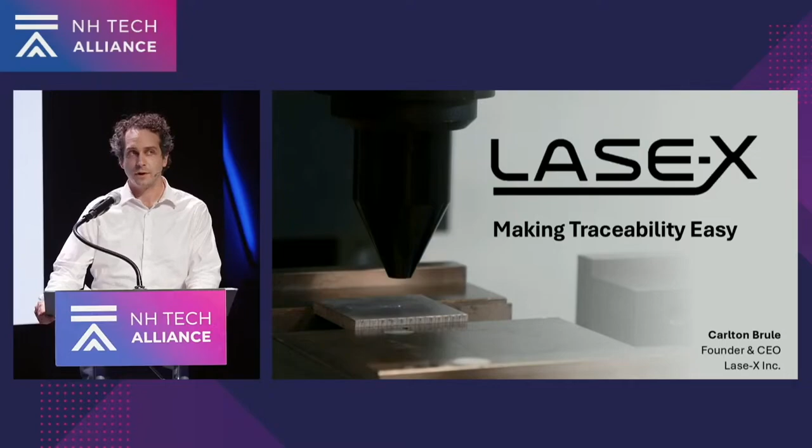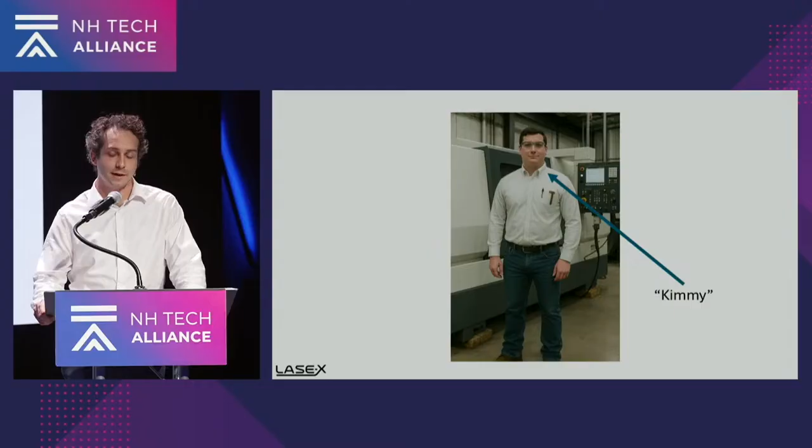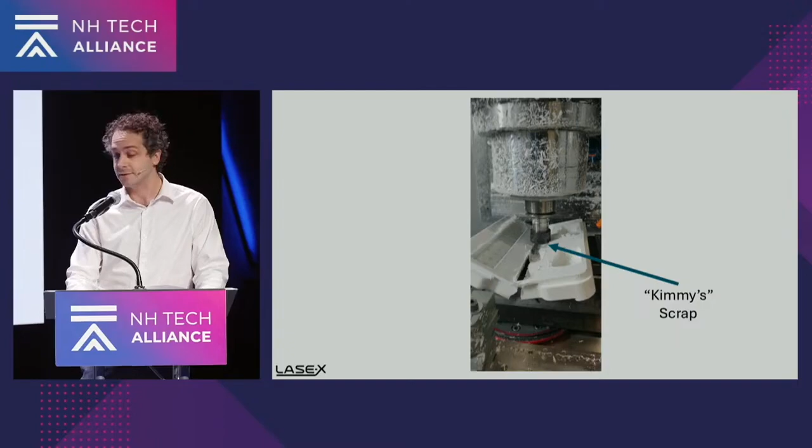It was there that a colleague and friend came to me with a problem. His name was Kimmy, an aerospace quality engineer, and he complained endlessly about the traceability requirements of the turbine blades his company was manufacturing. The problem he brought to me was twofold. First, the tool he was using to serialize parts was unreliable, often breaking or imprinting bad serial numbers on his expensive parts, causing them to be scrapped. Second, the paperwork on the shop floor was the bane of his existence. If his serializing tool was working, his parts were missing their associated paperwork, breaking the chain of custody, and again, forcing him to scrap his expensive jet turbine blades.

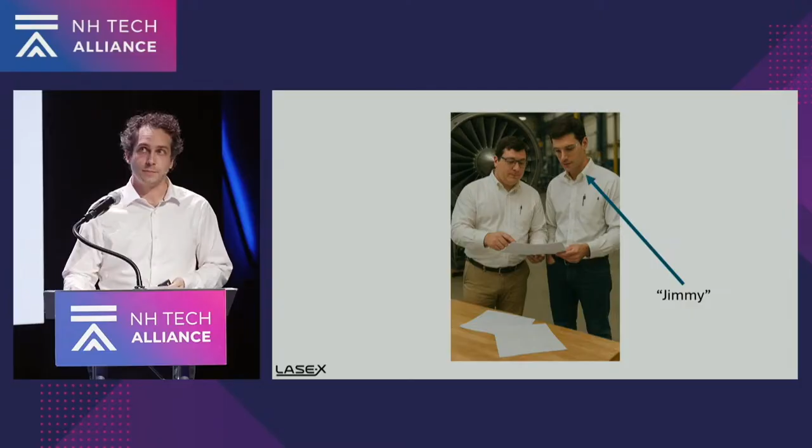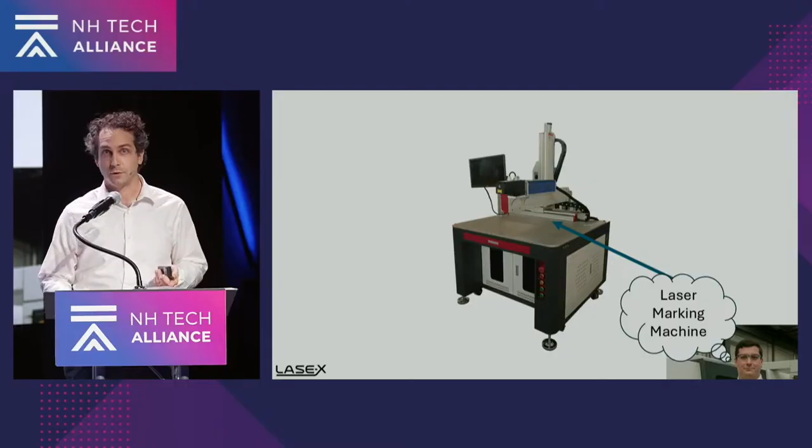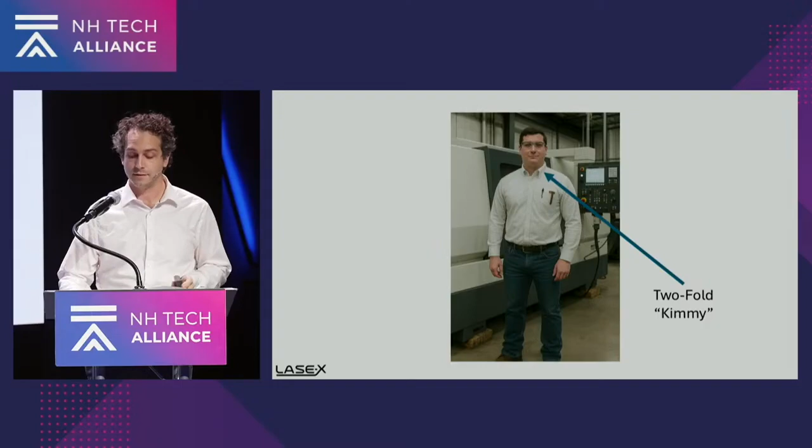Kimmy was interested in laser marking because it was a non-contacting process, meaning no more broken tools, solving at least one of his problems. However, again, his problem was twofold. First, the laser machine he wanted would add an additional step in his part production process, and second, convincing his boss that he needed a new expensive piece of capital equipment on the shop floor.

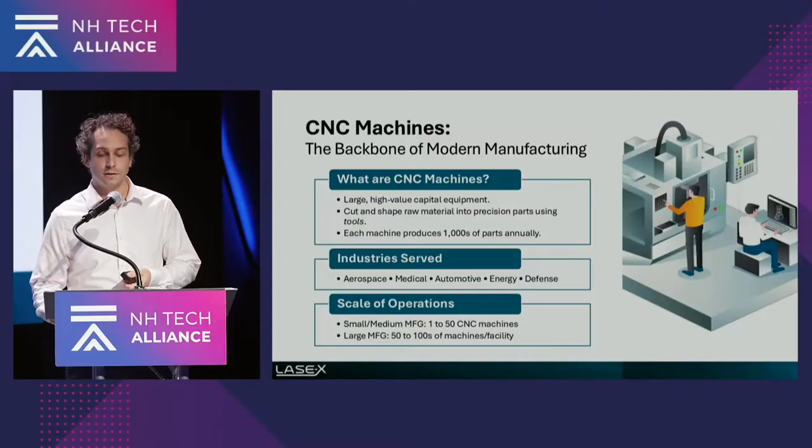So let's step back and take a 30,000-foot view on this problem. Boeing 747 has over 6 million individual parts. Most of these parts are cut in a CNC machine, the backbone of modern manufacturing. These machines take raw material and transform it into precision parts, which leads to our core problem:

paperwork. When a part comes out of a CNC, it enters a world of manual tracking: paper travelers, labels, signatures, and handwritten logs. If that paperwork is lost, incomplete, or incorrect, even by accident, the part becomes untraceable, and untraceable means scrapped.

Anyone remember the Boeing and Airbus incident where falsified paperwork allowed unapproved parts into GE jet engines and grounded hundreds of aircraft worldwide?

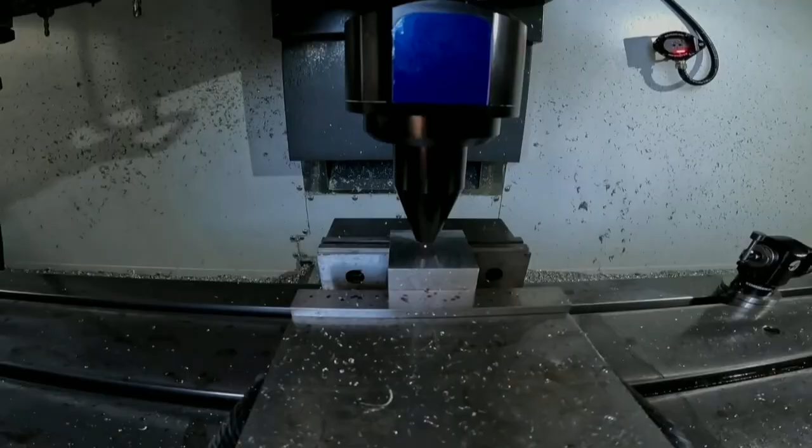Here's our solution to that. Our first product, the first machine tool capable of laser marking inside of a CNC. It's battery-powered and wirelessly controlled. We call it the Laser Marking Tool, or LMT. Packaged as a native CNC tool, it integrates seamlessly, enabling laser processing capabilities within existing capital equipment.

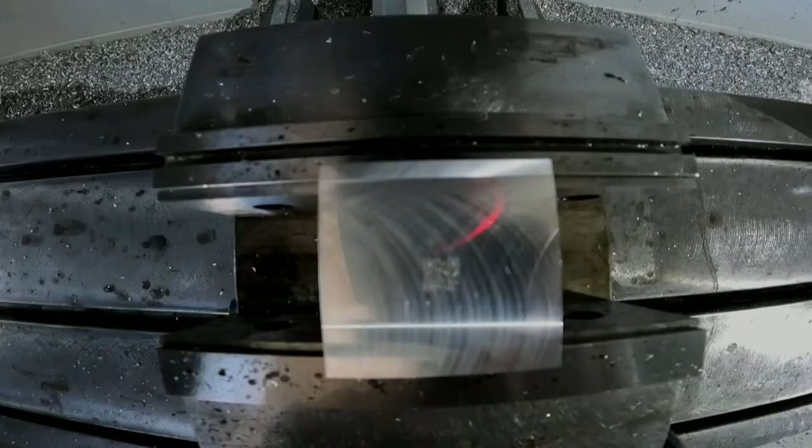By enabling laser marking within the CNC machine, we can solve the root of this problem: outdated process control. Now, a part can be cut and marked with a unique digital identifier in the same machine and in the same process. The part's unique digital identity, or digital passport, contains quality information, design data, inspection results, and certification history. As the part moves through manufacturing and the supply chain, its record moves with it automatically. The part itself becomes a trusted source of truth across suppliers, OEMs, and regulators, eliminating the need for paperwork.

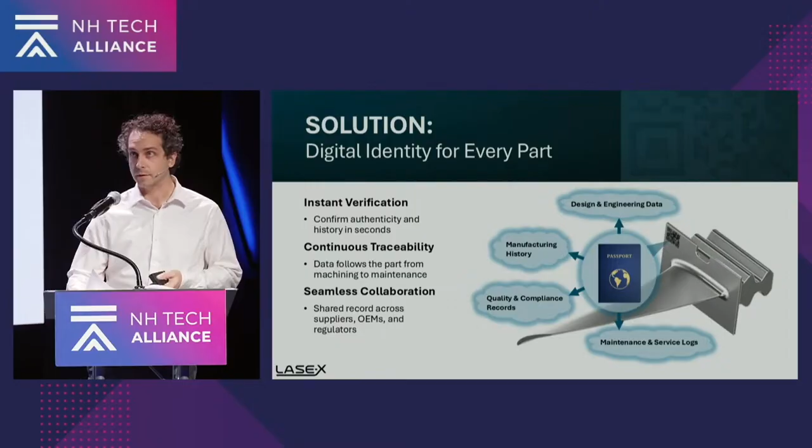So let's come back down to earth and look at that Boeing 737 again. Its millions of parts are sourced from thousands of suppliers, each under strict compliance requirements. Every component must be verified and documented to maintain compliance and chain of custody. If even one non-compliant part slips through, it's not just expensive, it can be fatal. Traditional documentation and tracking methods don't easily scale to that complexity, leaving room for things like the Boeing and Airbus incident.

But with Lase-X's digital passport, all stakeholders are keyed in to the supply chain in real time. From the contract manufacturer and assembler to the OEM conducting the project, everyone has access to information about the part without needing any paperwork.

To make the digital passport possible, we need to connect each part to its identity at the moment it's made. That's where in-process laser marking comes in. The Lase-X LMT marks a permanent, precise, and data-dense encrypted identifier onto the part while it's still in the CNC machine. The power of doing this in process is that traceability now happens at the same step as manufacturing, meaning the part can be tracked from its point of origin. No extra setups, no manual tracking, no chance for error, just a seamless, automated workflow.

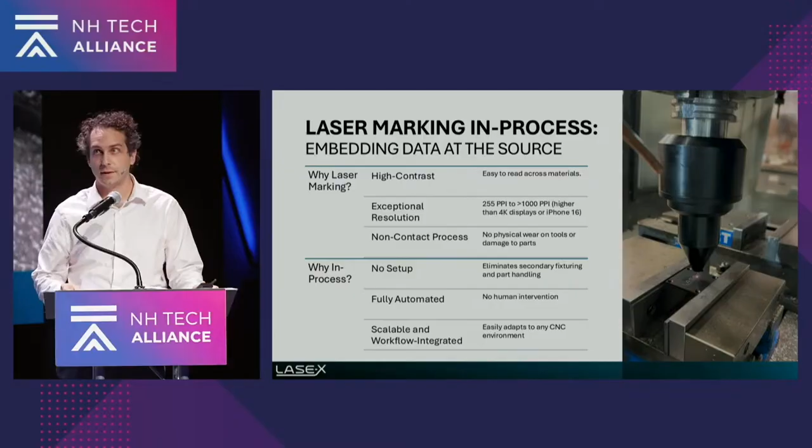Our technology is protected under 2 utility patents and has been developed by our founding team. We're engaged with industry leaders on co-development projects and have strategic partners demonstrating use cases at TRL-7 in both nuclear and aerospace industries. We also passed our first revenue milestone last month.

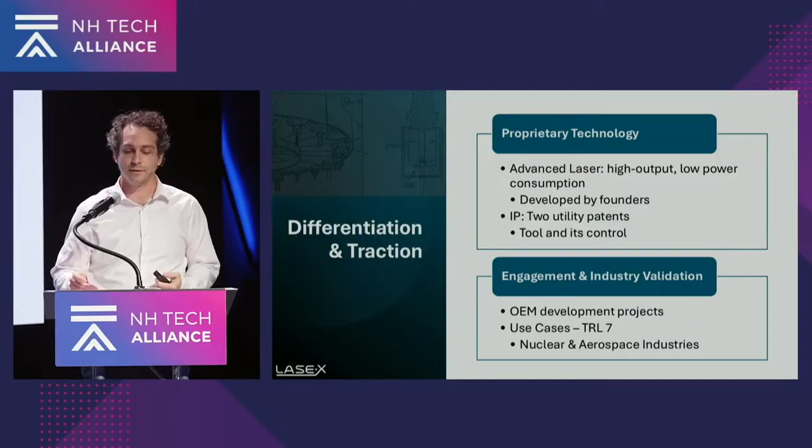I lead the company's vision and strategy. Dr. Simbing Liu developed our core laser technology. Theo supports our go-to-market efforts and leads communications, and James leads engineering and sales.

At the center of everything is our product, the hardware that makes the vision of digital traceability real. The LMT doesn't just improve marking, it redefines how information flows through production. Every laser mark becomes a node in a larger system of traceability and intelligence, connecting shop floor operations to enterprise-level insight. With the Lase-X laser marking tool, process control becomes intelligent collaboration, and the part truly becomes the paperwork. Thank you.